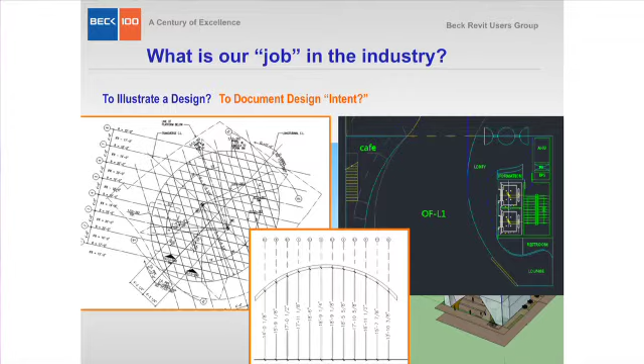Or is your job to deconstruct your design into a series of pieces of information and dimensions and details that will help others to construct that design in the real world? Or is your job to facilitate the built environment, to mitigate confusion between all parties involved in the construction process, to organize that process and mobilize all parties to work together to create what it is that was your original concept as a designer?

Speaking beyond the conjecture and language, what does that mean to us as the industry evolves? Many of us will say, well, our job has always been to facilitate the creation of the built environment. It is true that in an iterative fashion, we have always facilitated a building's creation. We started as designers and we created the look and the feel of what we were after. Then, as architects, we put that back into the drawing form that we sent to other parties.

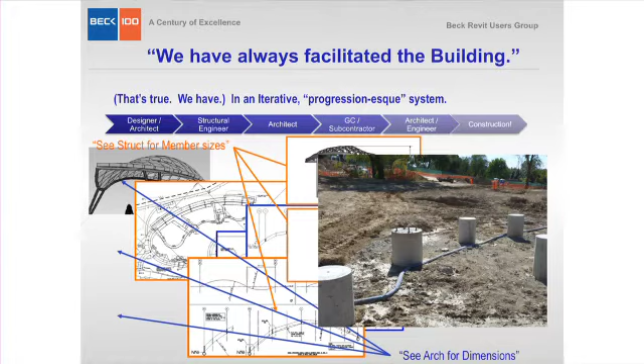Once the other parties received our two-dimensional drawings, they were then able to put their own drawings together, adding the information that their discipline needed to ensure the building's integrity. Once these drawings were done, they all had to come back to the original designing party for review. By the time this series of documents reached the general contractor who put the building together, the amount of drawings had grown, more so because all the people putting these drawings together were working independently. They now had all kinds of information, referring one another back to the original set of drawings.

Structural drawings would leave the dimensioning to the architects. Architectural drawings, which had shown structural members, would make sure that the structural information was received off the structural drawings. More time was invested as all of these compilations were put together into one new set of fabrication drawings that were done by either the contractor or the subcontractor responsible for that scope of work. Just like the structural engineer's original drawings, that work now had to go back to both the design parties for review.

Only after all parties were done reviewing and agreed everything was ready to be built could construction actually start in the field. But this begs a very important question. If this is the first phase, the first time when review and questions about the building conditions are going on, how much time is there really to react to feedback that comes back from the field?

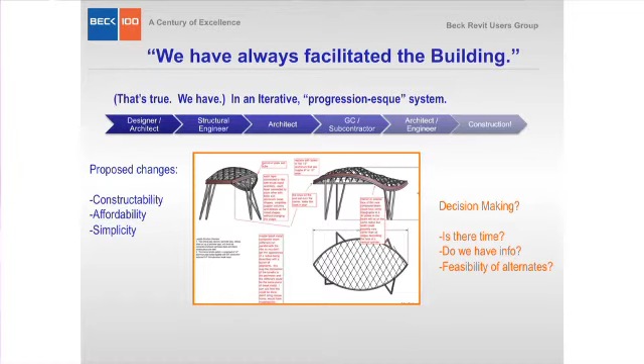So the architect and the engineer receive feedback from those who have to assemble the building, and they see proposed changes due to constructability, affordability, or simplicity. Can this be built? Is this cost effective? Or is it just too doggone complicated? And now that the construction process is so far gone, is there time to rethink these decisions? In a reactive state where we have just gotten this proposed change, do we have all the information necessary to review these changes and speak intelligently about them? And this late in the process, is it even feasible that we can consider alternatives with the time that we have left?

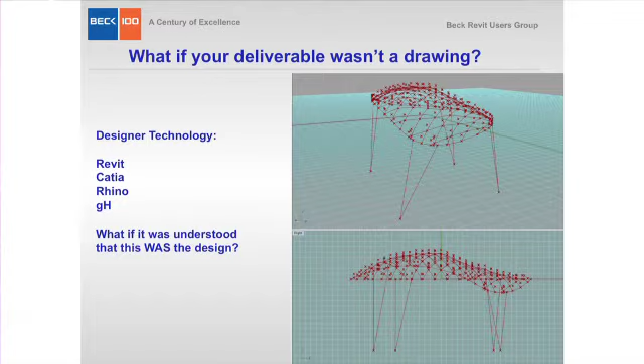Speaking of emerging technologies that are currently being used by designers and fabricators, can we start to eliminate the sequential process that creates this dilemma? What if the set of deliverables that we produce weren't a set of drawings? Designers in all disciplines now are working in a myriad of software that allows them to manipulate 3D information. Revit, CATIA, Rhino, Grasshopper are all being used by architects and designers, while programs like RAM, RISA, Fast Track are being used in the structural fields.

What if it was just understood that these models were going to be the deliverables, and that additional time spent deconstructing these into details so that they could be recompiled into fabrication models just wasn't going to happen? Imagine on a project that the designers came up with the exact form for the structure that they wanted to see in the built environment.

They then sent that form to the structural engineer, who, much like in the original process, was able to dictate what size member would be needed for structural integrity on that structure. The engineer then could forward that same model to the fabricator, who could take those structural members and say, now we need certain connections to happen based on both the members and the sizes and the shape, which were dictated by the original designer.

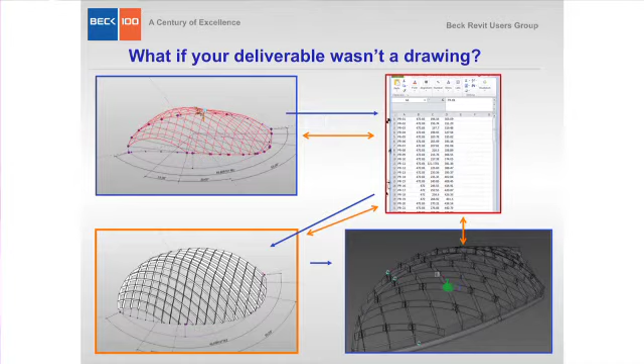In this new process, the deliverable is not actually a series of deconstructed two-dimensional drawings, but rather three-dimensional point data, which is delineating where all of the relevant locations are for everything in this design. Now, it's true that originally the designer created the points, and the points went to the engineer, and the engineer's model went to the fabricator, but in the end of this process, everyone's work is now related to the point data. This means that as the fabricator needs to make minor alterations, or the engineer realizes he needs to resize something, everyone's models are updating together.

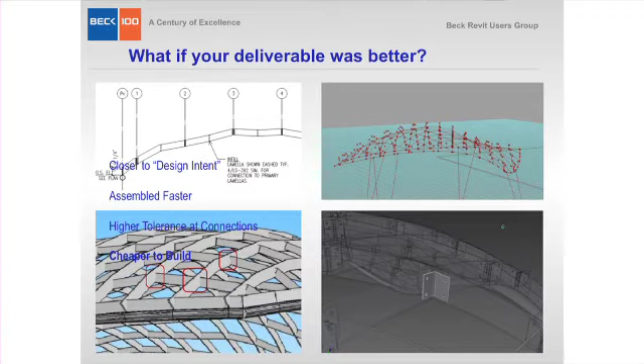What if this actually meant that you had a better deliverable at the end of the project? In this particular example, the original design team, as they deconstructed their design into details, started articulating how it would best be constructed. It was part of the original design that these members could not all be the same size at intersections. It simply was not possible based on the way they thought it was going to be constructed. And this is the lamella that we did at the Arboretum.

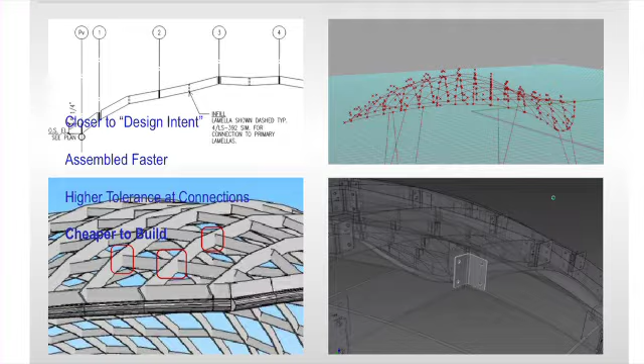However, in a process such as this, rather than recompile the deconstructed drawings that were done by the design team, the fabricators decided to take what information was important, i.e. the design intent, and then fabricate their own system based on that design. They realized that they could actually come up with a system that appeared more uniform and was, in essence, closer to the design that the designers were looking for originally. They also found out it was faster in the field to assemble, it allowed a much tighter tolerance at the connection points, and ultimately was cheaper.

So, can these processes of emerging technology also help us fight more smartly to keep designs that we sometimes lose due to the questions that get asked late in the game? If we consider the images that we looked at in the beginning of the presentation, we have started to decide on a design intent. Now we will work through the process of detailing and drawing and then submitting for construction, where we begin to receive feedback about the complex nature of the walls. These walls start out as double curved complex surfaces, and they work themselves around until they are completely vertical at the back of the walk-through tunnel.

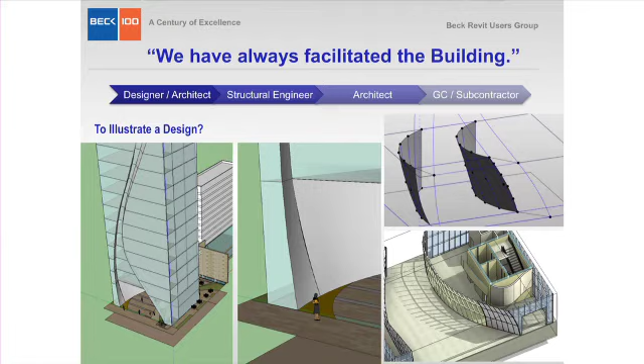Anyone who's been through a value engineering exercise knows that sometimes there's a difference between value engineering and reducing the design. And I'm certain that this design could be made cheaper if we simply remove the double curved surfaces and eliminate the walls through the first floor. And it's hard to make a case against that when we go back to our decision making relative to: is there enough time this late in the game to figure out the complexity of the walls? Do we have the information necessary to make those decisions? And how can we fend off the feasibility of the alternative, getting rid of the walls?

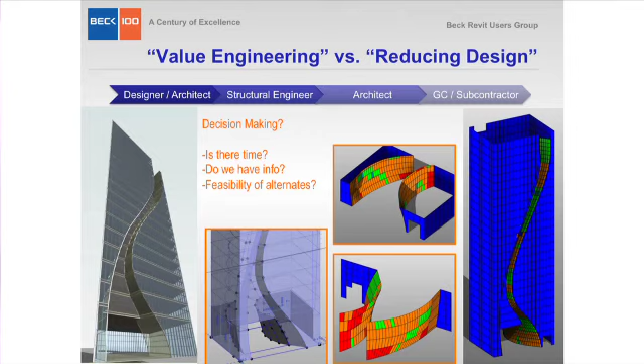So what if, the moment we have this design created, we were able to send our panelized skin to a fabrication shop who could then identify the seriousness of the deflection in each of those panels? They could rate those deflections into a series of costs, and we could start to alter the design little by little to figure out which panels were going to be the most expensive and which were not, thus saving our design.

So in closing, we can directly provide the panel fabricator with the same information, so we can produce a better deliverable, better built, by having more intelligent information out of emerging technologies, all coming from our design professionals. Again, this means we have to ask ourselves the question, as emerging technology continues to streamline our processes of design, what is our role going to be in this industry?